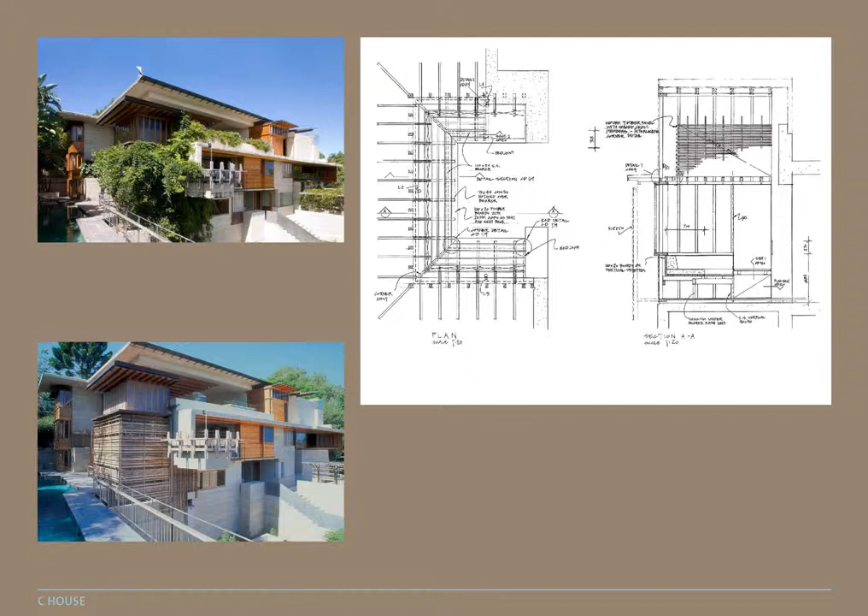There's a screen here which is a trellis for the landscape. It's also a pool fence because there's an occupied space inside. It's also extending that idea to how one experiences the room - a sort of trellis, a set of battens in a very Queensland idiom where the light filters through from the north. At night it's a lantern, tent-like at the top, so the light illuminates other spaces. All of which is developed, I think I have it in the next image, from the interior.

Excuse me, lost my button.

Developed a set of planes, an outside plane, which was the one we saw from the outside, which was the trellis. It has an openable window sash system, so it is a ventilating Queensland room. We do have insects, so there's an insect protection layer.

At the upper part, it's intended to be a lantern, so the illumination is critical, and how that becomes enigmatic in the space through the evenings. By day, the way the light comes through gives very dappled light on the interior. All of these things are orchestrated from understanding how the construction and materiality can enhance the ideas that really are about experience.

I'm not sure how you normally conduct these. I can just keep going, but if somebody really desperately wants to ask me a question, please do.

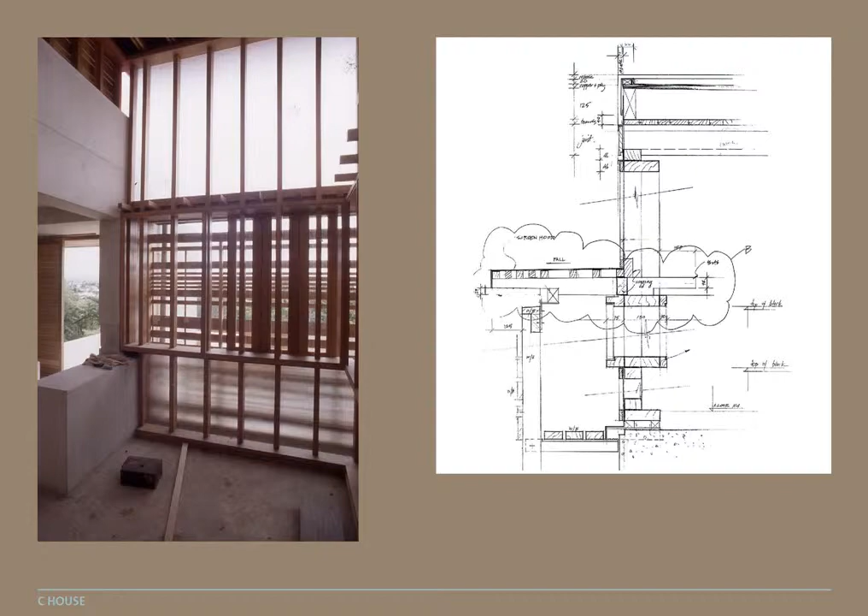And here it is, finished but unoccupied. To point out a few of those moments in the building, obviously an occupied edge, it is a tall space, part of the experience of occupation.

We understand and argue it's absolutely about making comparisons. So within the dwelling and all buildings, hopefully, there are comparisons of scale: tall and short, fine and rough, light and shade. We've all talked about being in a cave or being in a tent. If one is exposed to a range of experiences and then has a choice of how to enjoy them, we think it's an enduring thing that one can embed in a building.

I've jumped forward, but the idea is extending how, in the materiality, the tent and the woven upper part is basket-like. We were genuinely thinking how this and the fabric was sailcloth. It is a tent, and in a building made for life, you can rely on very primitive emotions, so this canvas or translucent material flaps in the breeze and adjusts the light and so forth.

Because it's an independent building that you occupy and get inside, you can believe that you actually are in a garden, or in an arbour, or in a tent, or in a light fitting, all those things. Everybody has their own interpretation, and that's fine because it's never one thing.

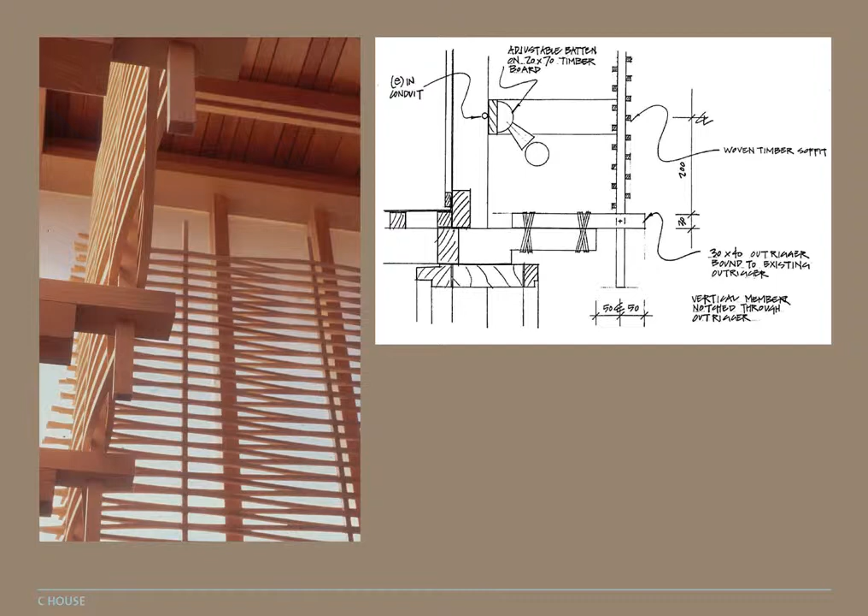But when the celery top pine was available, our client found a suitably large quantity of it, but it was already cut in particular pieces, so we had to work with the makers to work out which piece would suit each circumstance. So the rafter detail is a composite rafter made of 3 pieces of timber that was available and already cut because there wasn't large timber available. A lot of the tectonic detail in those decisions came through this process.

Once one comes into the formal space, the living room - I'm purposely not showing the building, for those who don't know it, it's very hard to see where one is - but I think one arrives in the courtyard at the centre of the house, then can move into a hall.

The hall has been detailed so it seems as though it's outside - the exterior finish becomes interior. A shiplap detail in timber work is made where the tongue is made of translucent material, so it's as though it's a screen. The idea of external screens and internal screens are all made one. Very precise, and people don't necessarily understand it at first, but these are the things one embeds through the process that ultimately make a massive difference.

So when one arrives in here, there is this ambiguity - am I inside or outside? There's an independent building that's made, which is the formal enclosure, as it was here in concrete and as it now is. So a full timber enclosure was made, here using the New Zealand kauri, as I mentioned.

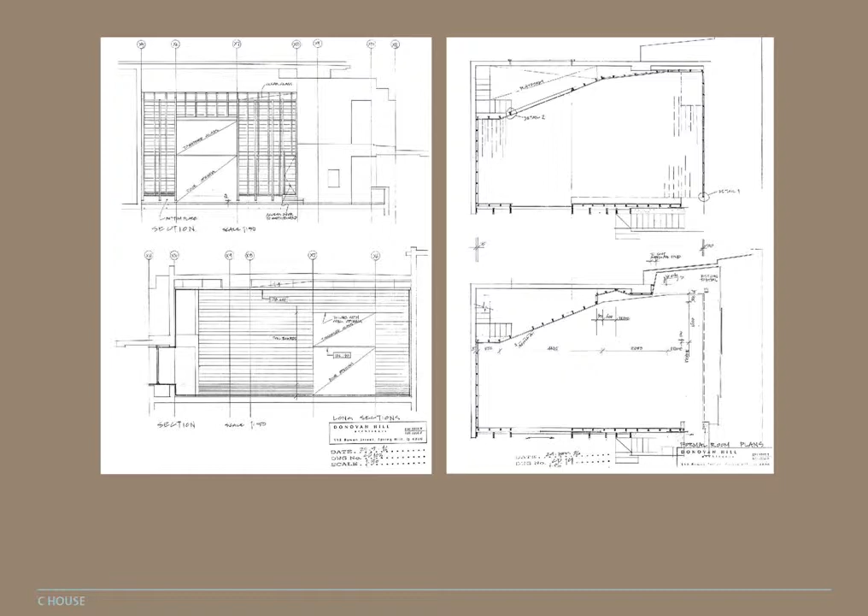Another anecdote about the project: our client recognized this was a house for life. We are still involved in putting in furniture, but in the first instance, he would sit, and we would sit, on concrete or timber lumps and bumps. So there's a way of occupying the building edge, and it's its own room — you recognize it has its own ceiling, its own soffit. Very much a graphic idea of extending the dual proposition of this protecting ground plane and enclosure of concrete, and the refined parts made for occupation in the house.

Some befores and afters.

There are, as you'll see directly, quite significant views to Brisbane City. Brisbane does operate in a way that views are important — it's a very view-centric city. In general, if you have a view to the city, irrespective of orientation, it seems to influence land value.

This house does have a view to the city, but also cross-axial views to landscapes, setting up plates and moments for how the house can operate, including the furniture store I described previously. There's a platform on top, and we imagined the concrete almost as a massive light source, with skylights on top, as you can see — the light bounces off the concrete and comes into the interior. This is also overlaid with the idea that there will be special events, and there have been — I've seen a small quartet sit on that platform and play wonderful music at the occasion of a wedding.

This extends the thinking about a Queensland building — the typical understanding of battens, light and shade, filtered light, and so forth. Because of the idea of concrete and these refined timber parts, this building likewise has a translucent tongue detail that allows for enclosure. The reason it has tongues — well, this one doesn't, it has brass fittings that separate — so one feels as though one is in a space, but it's the same climate as the hall.

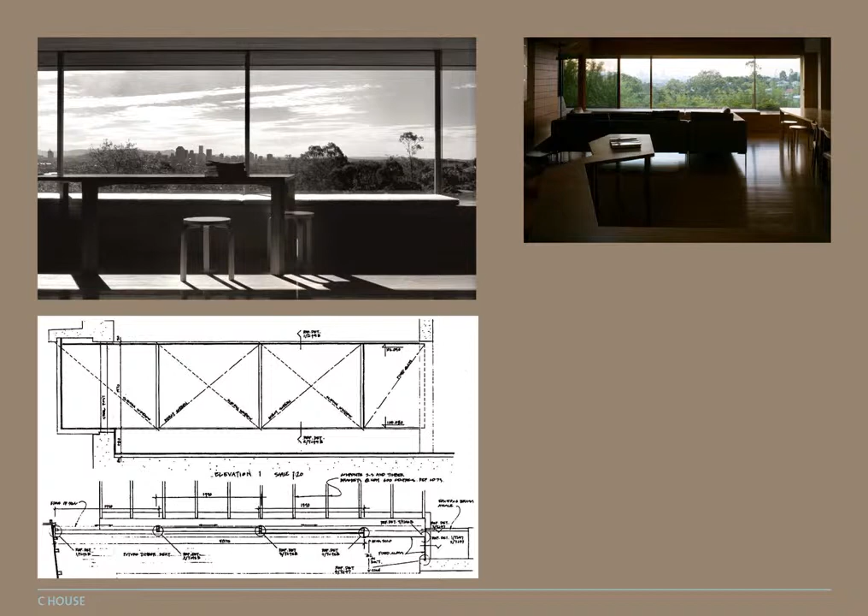We thought that if one can set up a system with almost frameless, adjustable views, it becomes an idea of an opening one is looking through — very powerful in some cases. It's difficult for the uninitiated, or people who haven't been there, to know whether they're inside or outside — looking through a hole, or through a window wall that one can close and operate.

And those details are shown here. Pragmatically, the cross-section of that part of the window, the same window. I described how one occupies the edge. There's a series of inventions here, or things that we worked on with the builder and with glazing contractors.

The glass in this project is in some ways structural. There are 90-degree planes in the glass to ensure, like this amazing example here, how the glass is spanning between studs. One has to think about, and clearly there's consideration that ultimately influences perception of the building, subliminally or consciously.

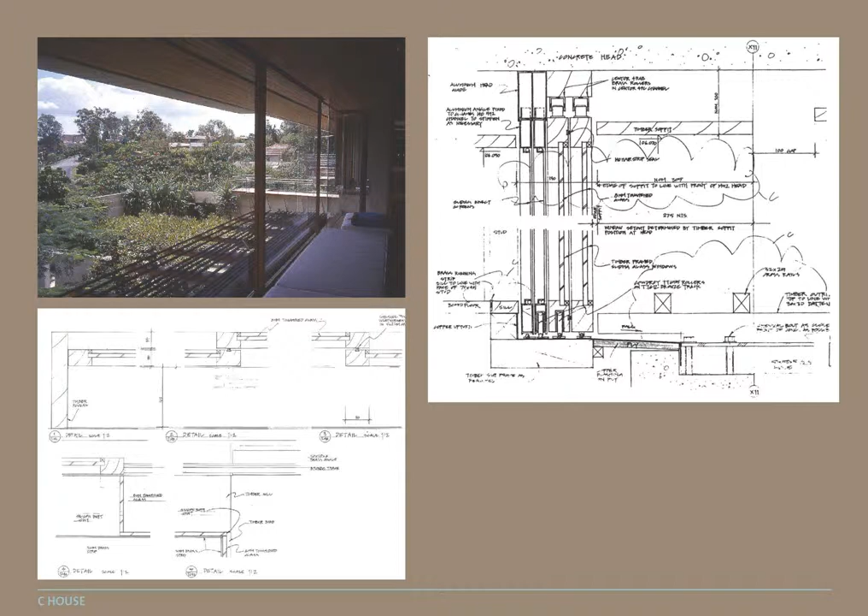In the idea of how one is making a landscape, the pragmatic requirement that sets that in motion, in this instance, is a horizontal trellis outside, which one sees from the arrival point, and which, when one looks through the window from the previous image, actually controls the foreground. So this has a dual role, and you see it here in some detailing.

So the hall on the other side of this, which I described previously, is underpinned by the idea of: once you actually enter the house, when am I really inside and when am I not? Because you arrive in this space and know you've arrived, but you're very much outside under a roof, a very room-like experience.

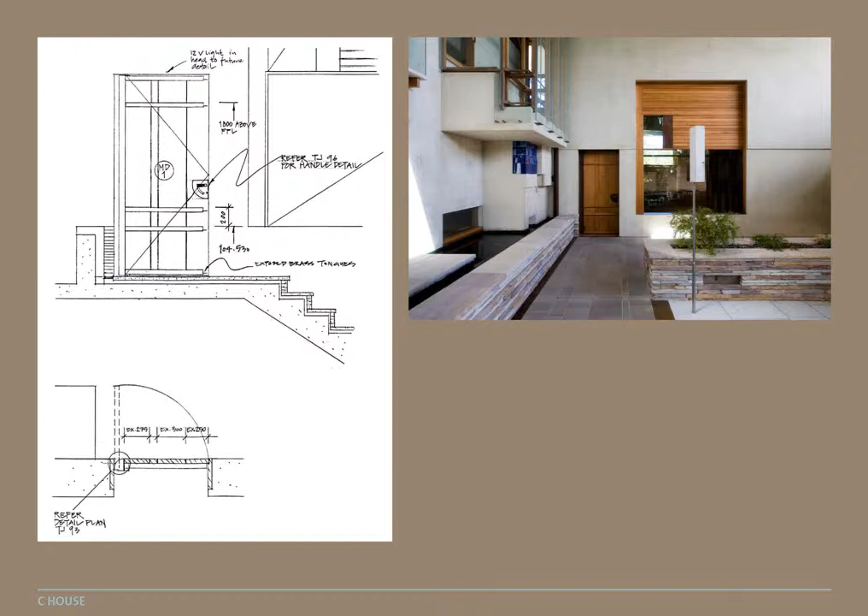In selecting all of the celery top pine and going through that timber list I mentioned previously, there was only a certain amount and certain sizes. We ensured the largest pieces were held until this moment. I think it's the most significant moment of arrival, and there are some 300 by 50 millimetre pieces of celery top pine that you see here drawn and ultimately in situ.

And they too have been detailed where there are gaps in those boards, but in this instance being true enclosure with a brass tongue. So very big boards, some horizontal rails, some brass reinforcing strips, which for those who care can see it in the detail, all of which is actually expressed to become the thing people respond to.

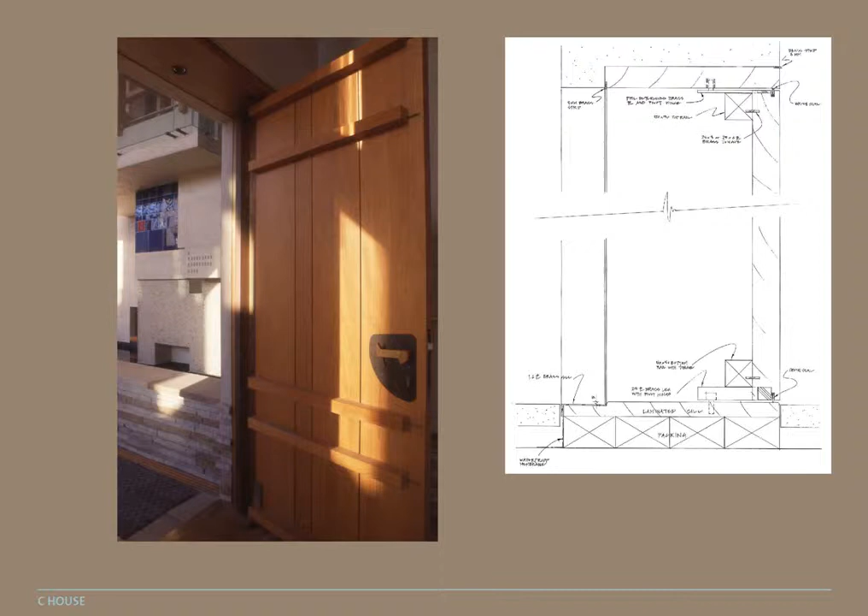So construction is absolutely firmly part of the aesthetic of the building, so much so that the things that could be hidden are expressed. Brass strips, which are reinforcing strips, are expressed as part of the detailing. Obviously the handle is part of this, which I'll show you next.

From the interior, there are very purpose-made parts, how if it is a gate and one is trying to make openings, apertures which are openings and not doors, and therefore having reveals that are not rebated.

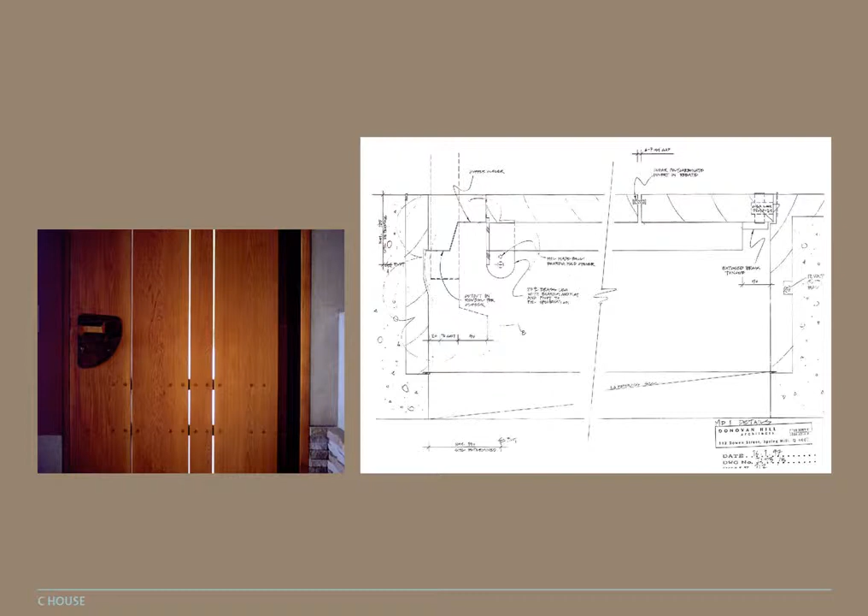I'll get this right, I'm sorry about this. This is a plan of the detail. Here's a timber jamb that's inset into the concrete, and on the other side this is the door, and there's a closing piece of brass that, when the door pivots, opens and allows one to make a detail which you can't see in the image, I'm afraid, so far away, but it extends the idea, the craft and the intelligence of how it was put together, reinforcing the intent for it to seem as though it's a gate.

And even in this instance, how one makes handles—I think as a little anecdote again about participating in this process, if one has an idea that one is participating with others, I wouldn't know how to put it, and I didn't know how to put it together previously. We worked with others, we worked with these two individuals on brass paneling and so forth. But the idea comes from one which is about the building in use and the comfort of occupation.

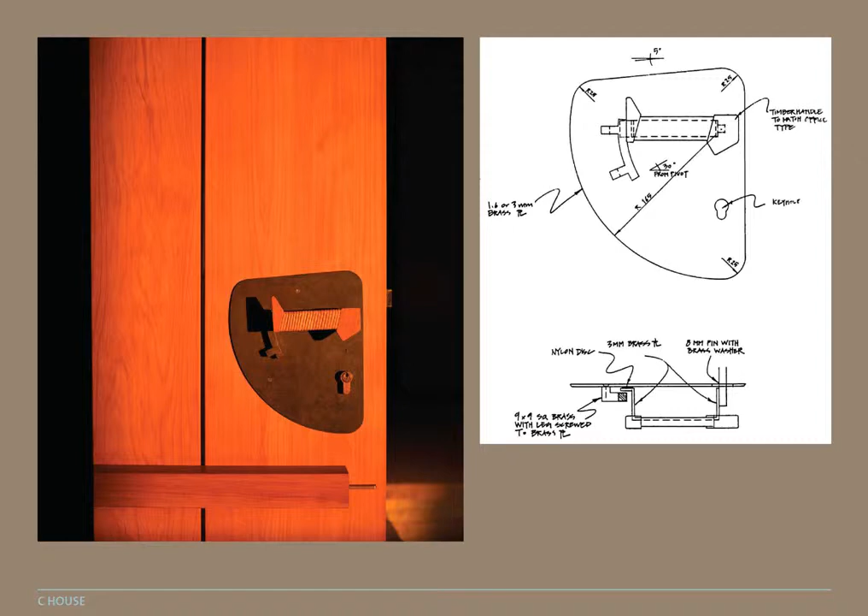If ever one was going to demonstrate that—and there's a whole history of it in architecture that we know, and this is an extension of it in our little moment of the world—how that can be understood and resonate through the quality of the building.

I think the next question is, how do they understand the ambition for the place? How do they get across the line and understand that they really are going to be putting all of their efforts and knowledge into this building? That's part of working in a group of people, being able to understand those things and promote the idea that this is an opportunity to demonstrate our skills - not for its own sake, but for the qualities asked on behalf of the proprietor. So what better way of making an enduring quality than having it developed through the way the house is put together.

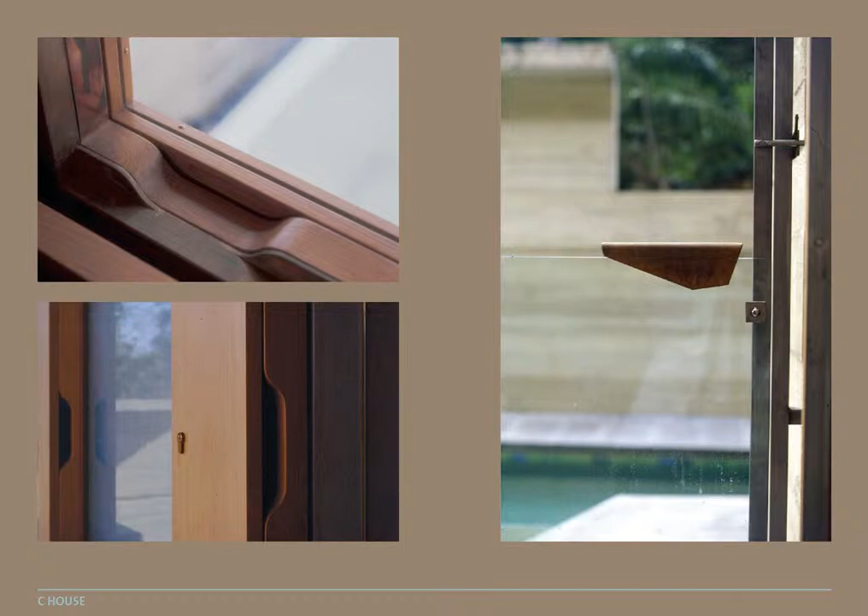I can talk about lots of things involved with it - the outdoor space as it is at the moment at the point of arrival. I think there's one more set of images about this house, about this box, which is an adjunct room to the main bedroom. You can see it looks through the outdoor room to the city. So it's about a view, but it's way more than being about a view - it's how it's part of a composition of space, or adds to this composition of parts within the courtyard.

Some other things - it is also celery top pine. These are offcuts of New Zealand kauri. When we were profiling timbers and there was a pile of timber, everything was used, because everything is very precious - nothing was thrown away. Its functional role is that of sound attenuation. Being a building, there's a road down the hill with road noise coming up, and there's soundproofing behind it.

So everything has this required sort of output, if you like, and then how can one extend that and develop it to contribute to an overall composition. Clearly, when one looks at this from the outside, it's a set of elaborated structures. It's sat underneath the light, and it extends the idea of a landscape. What really is it from this space?

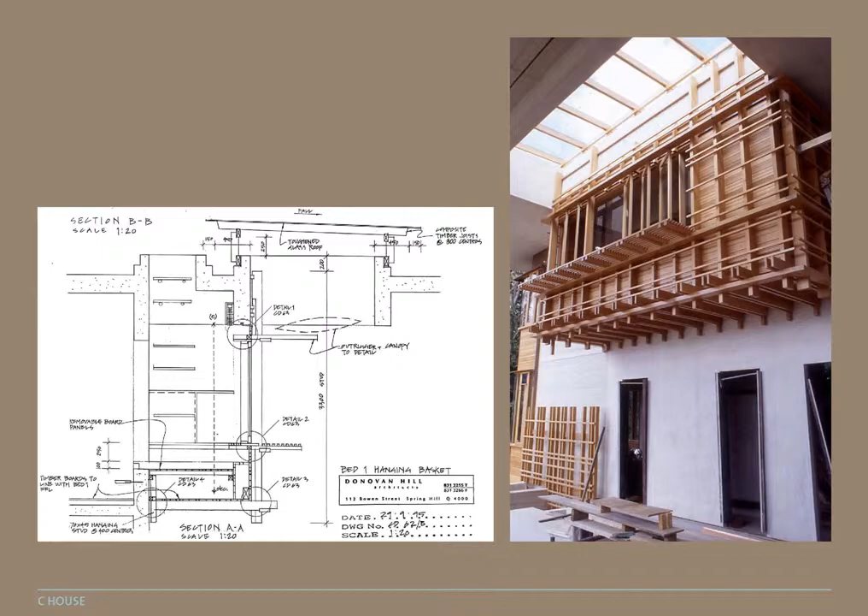To look at it in cross section here, this is the outside from where the photograph is taken, and here is the interior, which I'll show you directly. Things that show up on it are really by necessity, and I can see them occurring in this house too. Michael Markham and I were talking about an opening door in this sub-room, which for the children is a very large door that can swing out wide to make privacy in this room - simple things that through the action of use become absolutely clear once they're in place.

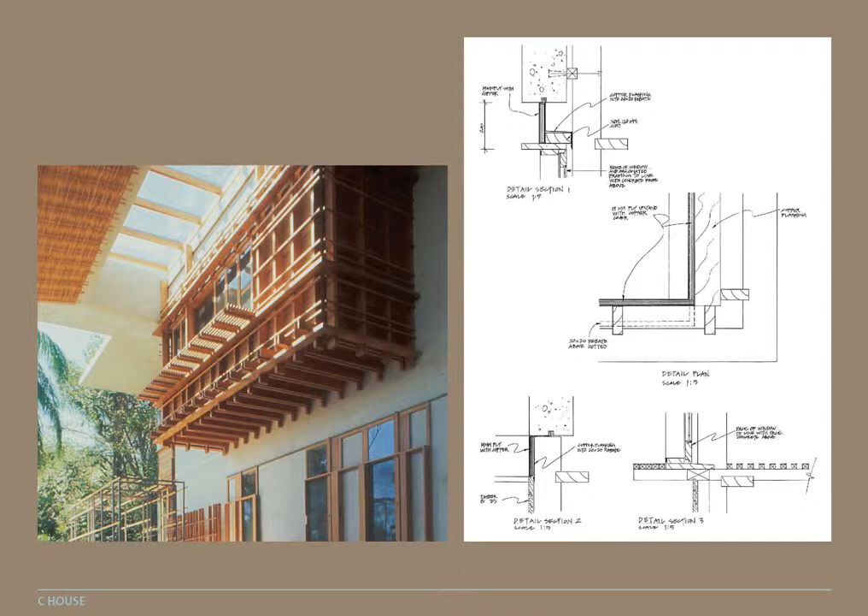In this instance, that is the main bedroom, and here is the public room of the house. One does need to establish privacy, and this horizontal projection does that. In addition, it's very light reactive and demonstrative of the idea of a trellis that has become an occupied place.

Going back to the cross-section, I should have pointed out there is a hole above it, so you can slide back a hatch and sleep here under the stars - very subtropical. Also only the owner of the building can actually get onto the roof. It is concrete as well, so this is the way of getting onto the roof - it has a whole lot of functional demands rendered in a certain way.

I didn't have a photograph, I'm sorry, but there is actually a bed here. Functionally, it's almost the primary space in the concrete room - the room itself is only about 3.2 metres wide, but long, so it has two settings for furniture, plus this space, which is a main way of occupying the space. In addition to all those things, it's also storage - underneath here are storage panels.

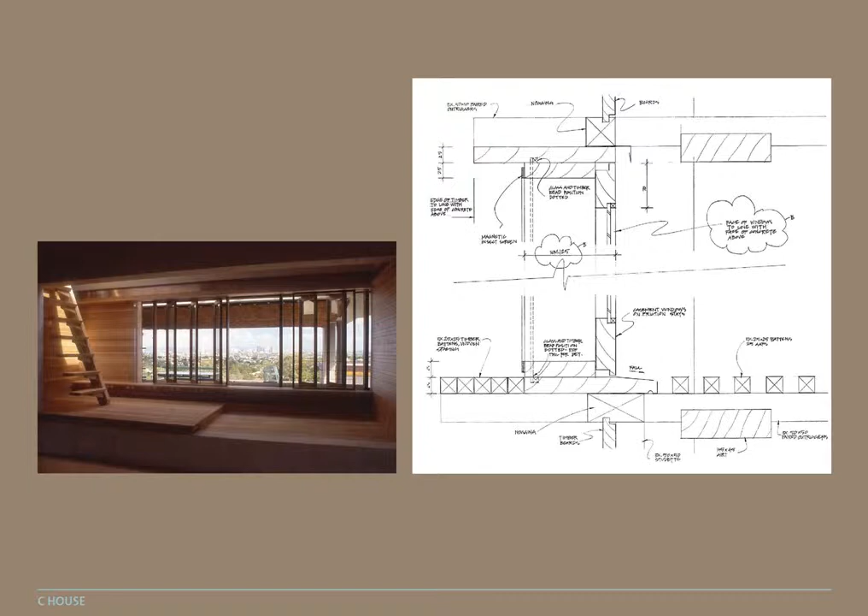So I'm going to check my time because somebody's going to keep an eye on me. How much time do I have?

I'll go quickly. So then how does one extend that thinking into other buildings, into sort of larger scale buildings? It's a question often asked about people who do a lot of residential work: well, that's all very well and good, but how do I pull that off when we're involved in larger things?

This is Santos Place in Brisbane. The real thing about it is that we were trying to make a Queensland building within a very strict corporate and development structure.

I mentioned this thing about making a sphere of influence. We're in the very early days within the Queensland process to actually have this set of values that everybody effectively signs off on, and one can always refer back to go forward. What is it that makes a building in our setting that one can keep coming back to?

Colour was something we introduced very early on, and there's a whole history of colour in buildings which one can say is contemporary, or whatever one wants to describe it as, but there is a fact about a history of architecture with colour. The Queensland building needs to be a modulated building.

You recognise the things here that aren't ours - anybody from ARM will forgive me - but it's a great example of people thinking about the way buildings can work with modulation. The tectonic, and I think that's the core idea of what we're talking about, is how you build buildings and how they become the identity of the building.

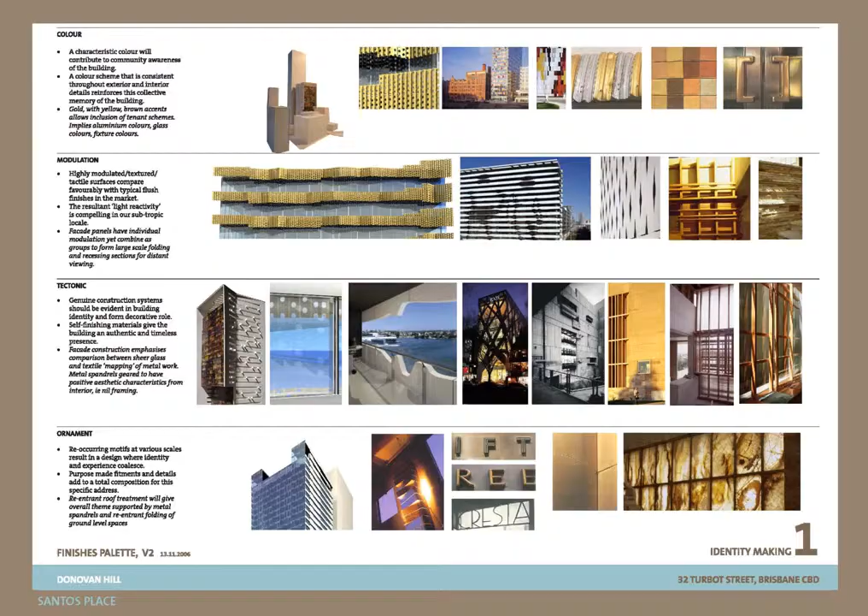And although we called it ornament, what we're talking about - and it's still valid - is how one can include motifs that have resonance at all scales of the building. So we developed this with our client and the team, and that was all endorsed.

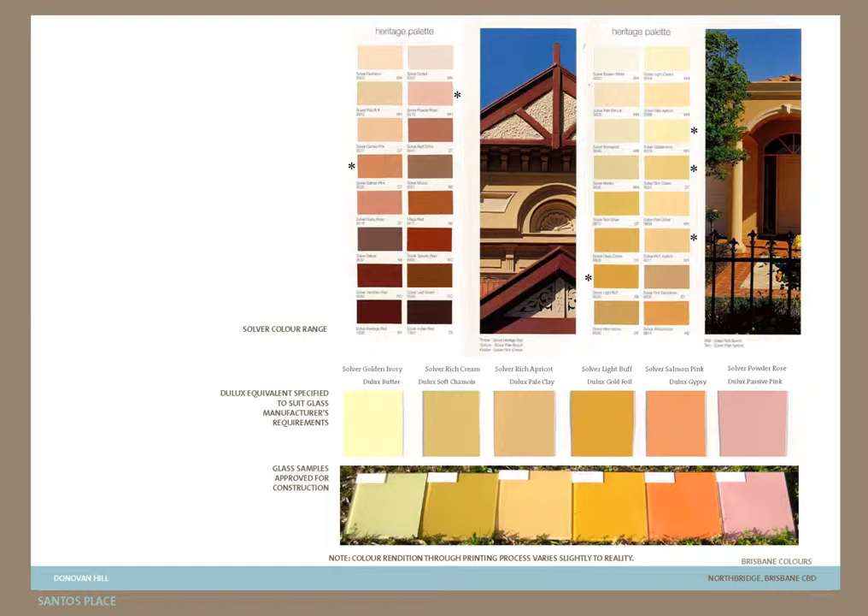Colours of the building were developed out of a palette based on Federation colourings of Brisbane - other examples from the history of buildings. How do you make a building in Queensland when all the pressures are about economy, efficiency, and leasing? How do you make a building of its place?

In this instance we worked with a colour scheme very much about the place - the local stone and the local landscape. Our original model, I think, demonstrated those ideas about tectonics, the way facades can be very different.

It's a circumstantial building. A building isn't understood in the round - a building is understood from various points of view. So how does one extend that original model, and how did it end up?

I think if one can, even within this context, uphold a set of influences that everybody can adhere to - and I think I can certainly describe some correlations between this and the original model.

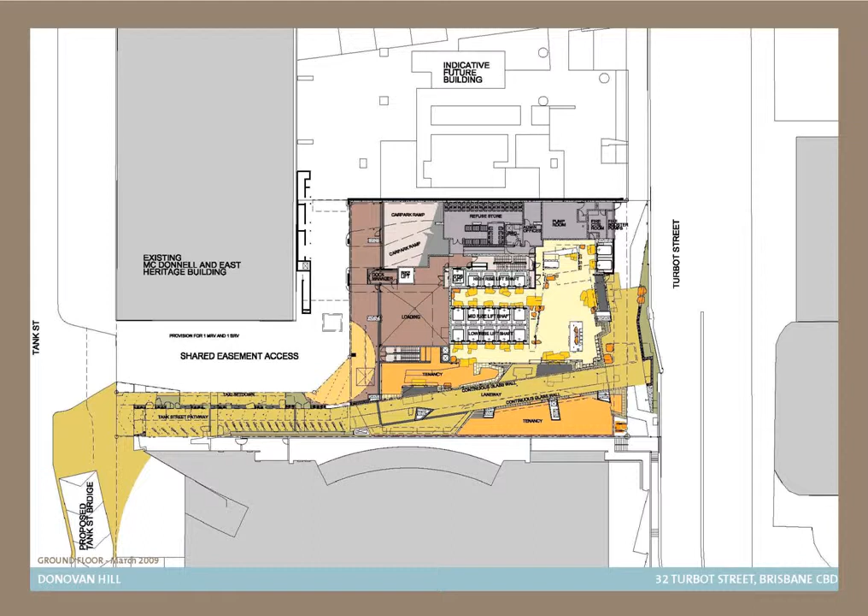I won't go into the building too much, except that it's got a very active ground plan, which Brisbane doesn't have many of. The floor plan itself is just an absolutely ruthless commercial efficiency diagram - maximum setback, minimum cost, maximum rent, maximum profit, all those things.

We then worked on how to develop those ideas in facade making - various options about in situ precast, tack-on formwork, spandrel panels - but ultimately, the significant thing about this one is that it is a design-and-construct process, so we are working in a secondary role to the builder.

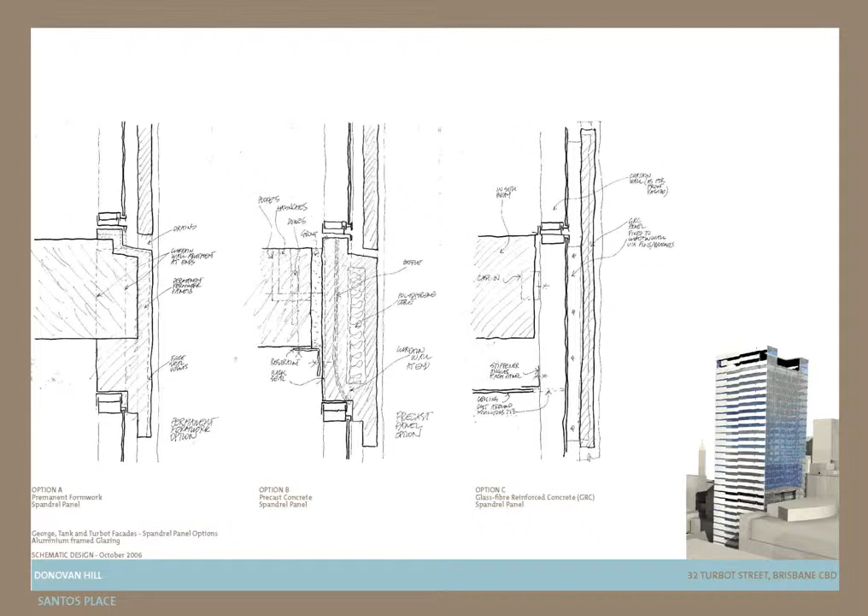The builder is telling us what to do, so importantly, early on in the process we tried to identify and get everybody to support the ideas of the building, while still finding how the builder wants to actually render those ideas. In this instance, like 99% of the buildings in Brisbane, although we tried, it ultimately became a curtain wall system.

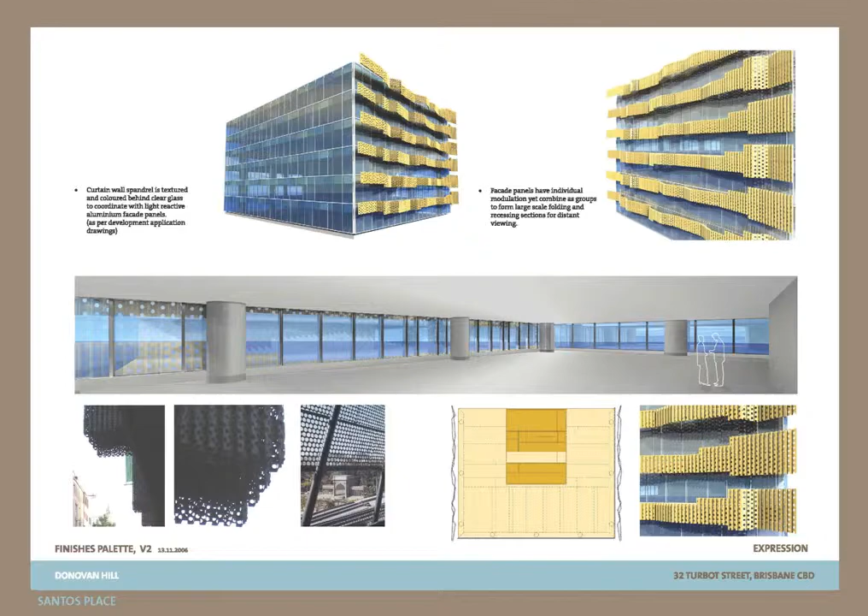That curtain wall system, the builder wants to get up as quickly as possible, get the rent, etc. So we developed ideas about modulation, which isn't only about the way the building looks. It does have a genuine ESD value. The two elevations on which it appears are the ones which have the low sun in Brisbane, so it is actually protecting the building.

Developing those ideas with our client earlier on, and developing them further. Still at this point talking about perforated elements in the elevation, but allowing for the enclosure of the building to be built very quickly.

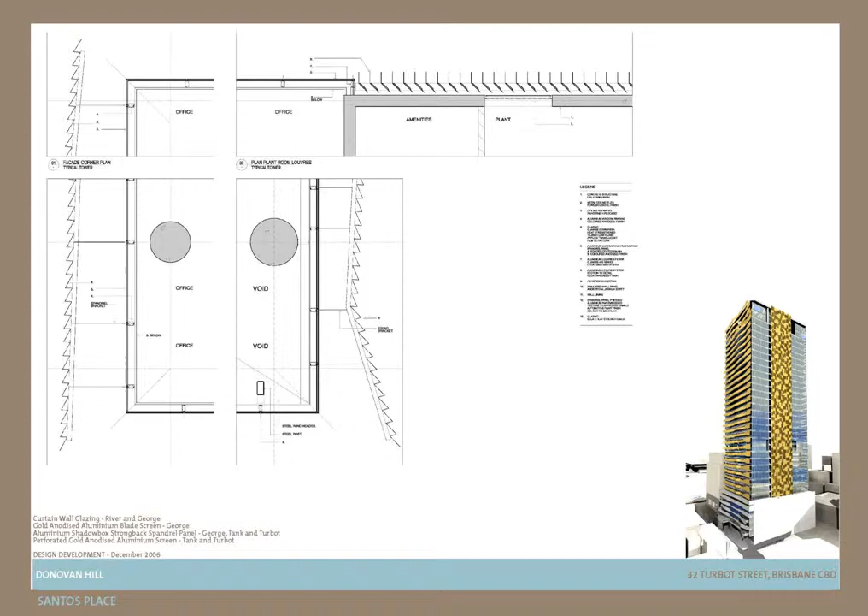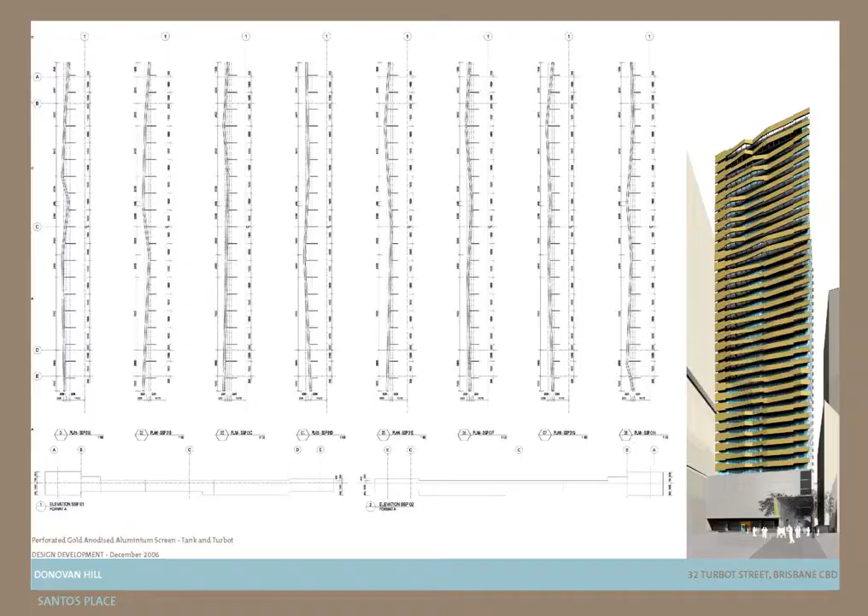Through the process, when I talked about a sphere of influence, I'm referring to authorities as well. So there's an approval process which is critical, and therefore the milieu in which one works is very influential, and the authorities are obviously influential in this setting.

So the set of drawings were made which actually ultimately became a prototype, and it's not quite tongue-in-cheek, but we got to the point about saying, how on earth are we going to not make solid panels, but extend the idea of making a motif that was recognisable in its place. So this prototype was made,

which is a zigzag in plan, so as the light strikes it moves across the sky. Sometimes it appears as a solid, on other occasions it's very, very transparent, and that was set up to suit the sun path and the protection. But then how to actually achieve that in a motif.

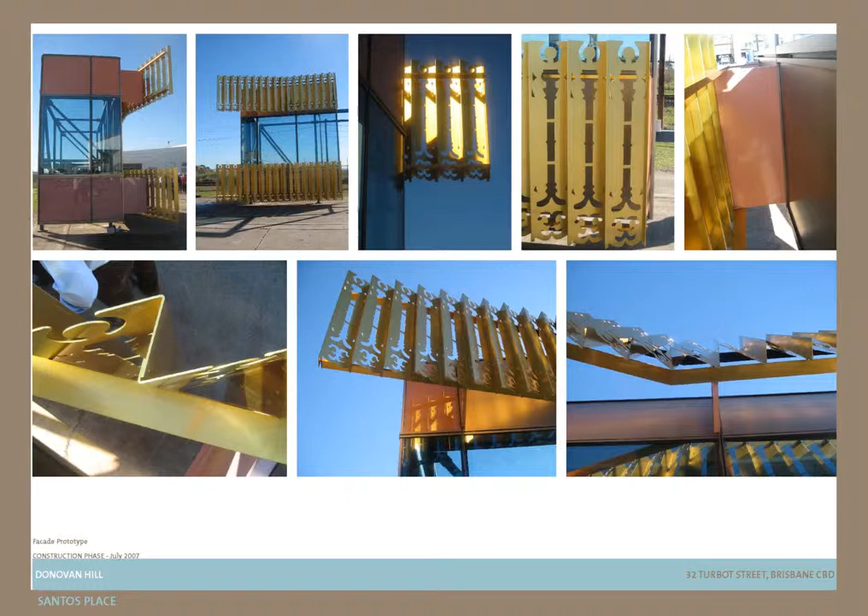This one is like, one might reckon, a Federation sort of motif of balustrades and so forth. Anyway, the point about this is that we do lots of things that then get dumped, including this, which was thrown out as an idea. I think there's a lot of research in buildings and a lot of things that get discarded, which we all understand.

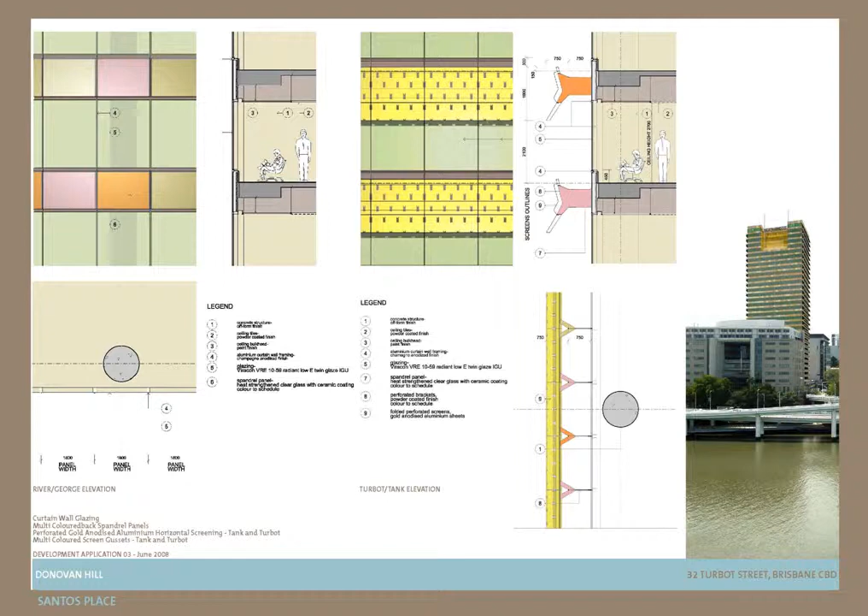We went back to an original idea through a process of working with these people, which was much like the original model of having a strip panel and some light reactive blobs in elevation. The light reactive protrusions were ultimately removed, and we developed this scheme.

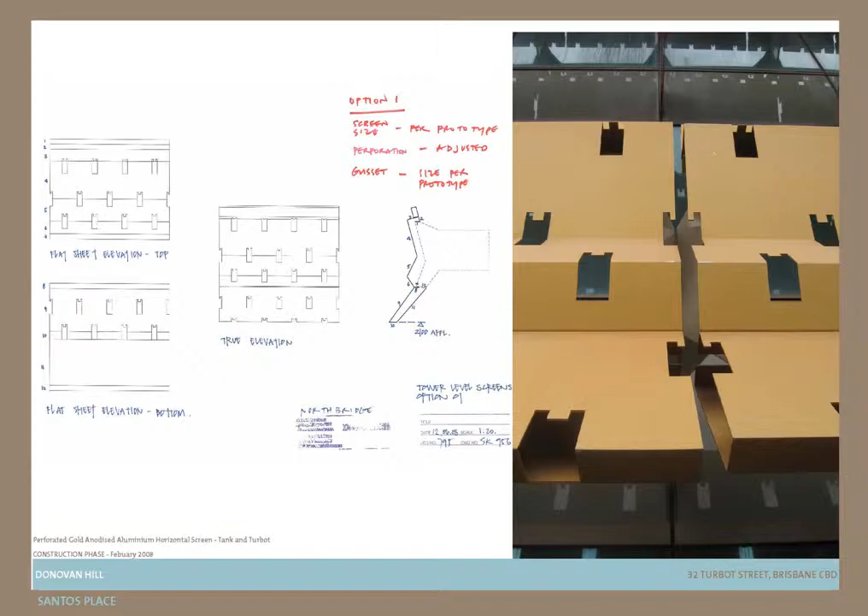We're able to think about it again with the group of people who are actually making it. So in this instance, it's not a matter of us as designers giving instructions and saying it will work. It's us setting the scene and setting ambition, and working with the fabricators who are actually making this stuff to see what is possible in an economical regime.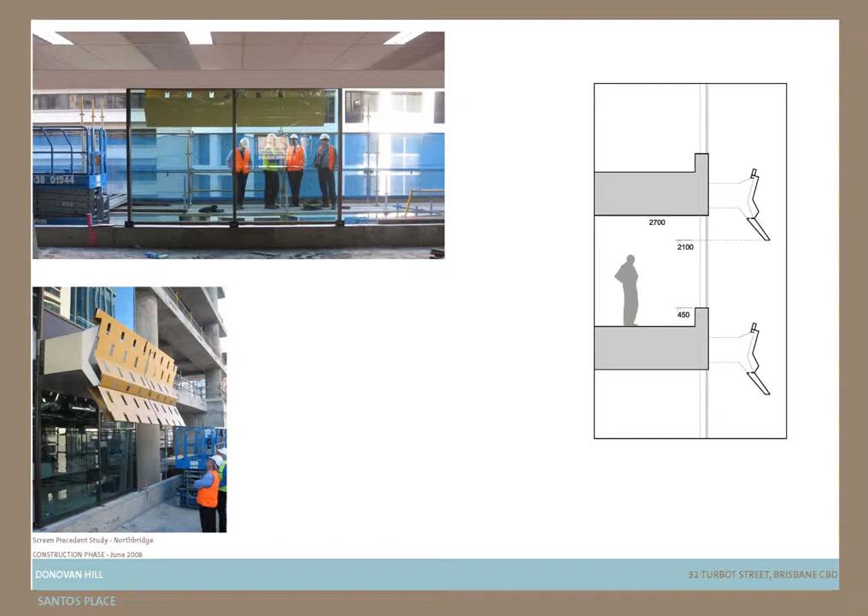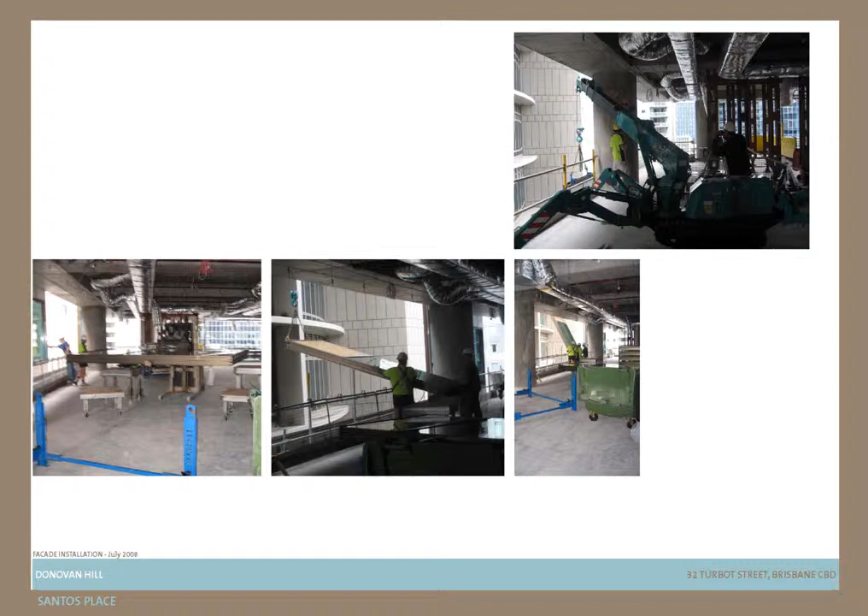In a sense it's very much like the previous building, but obviously not in its refined nature — the same process essentially. The process of installation, acceptance, always with people.

And just very quickly, the other building — it's exactly the same thing. How is it in a building which is also a Brisbane building? There's two things here which are very particular on this very commercial building: these sunshades and a brick building.

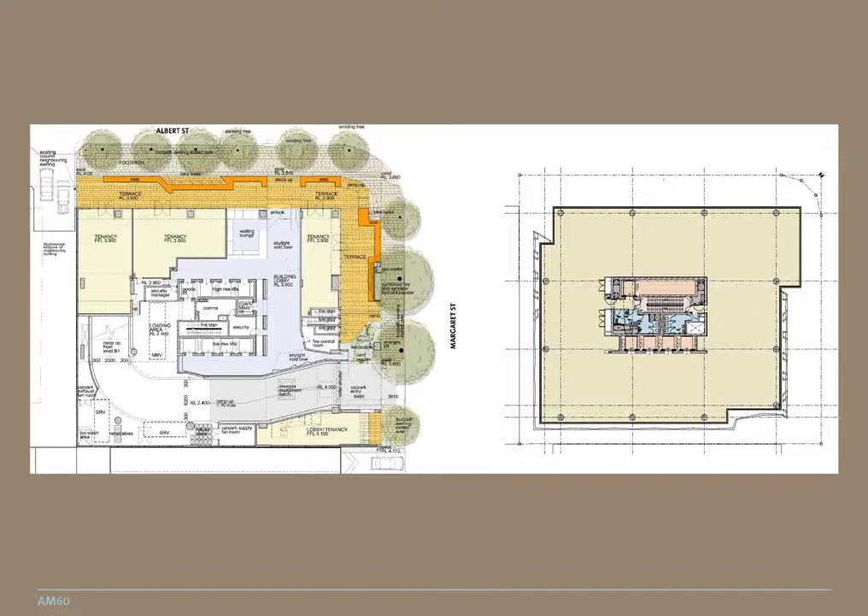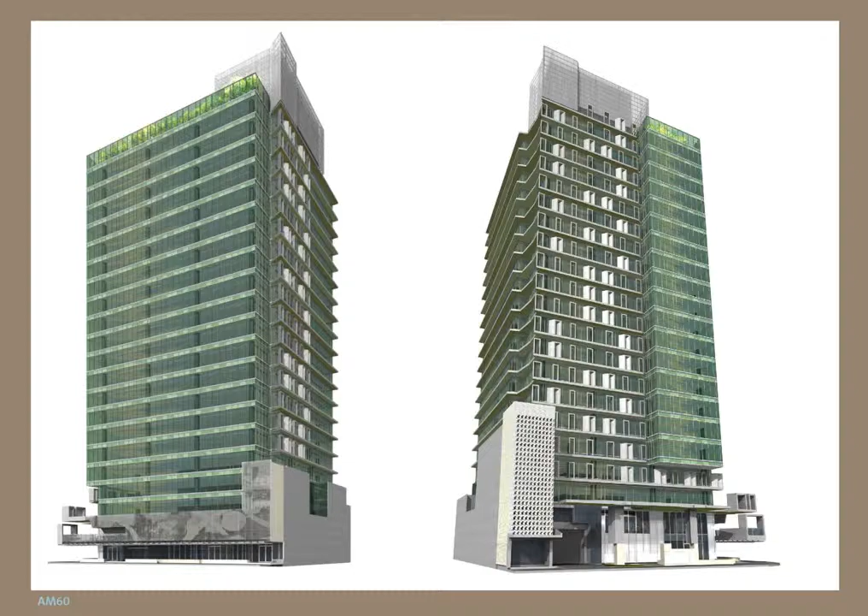Again, extremely efficient diagram. The building does respond to an urban diagram, the way that the city and the streets work, and the way that a building is understood as a top, middle and base. But very much from where we see it, the impact of these elevations on the street is a critical part of the understanding of the building, and therefore that's where the effort needs to go.

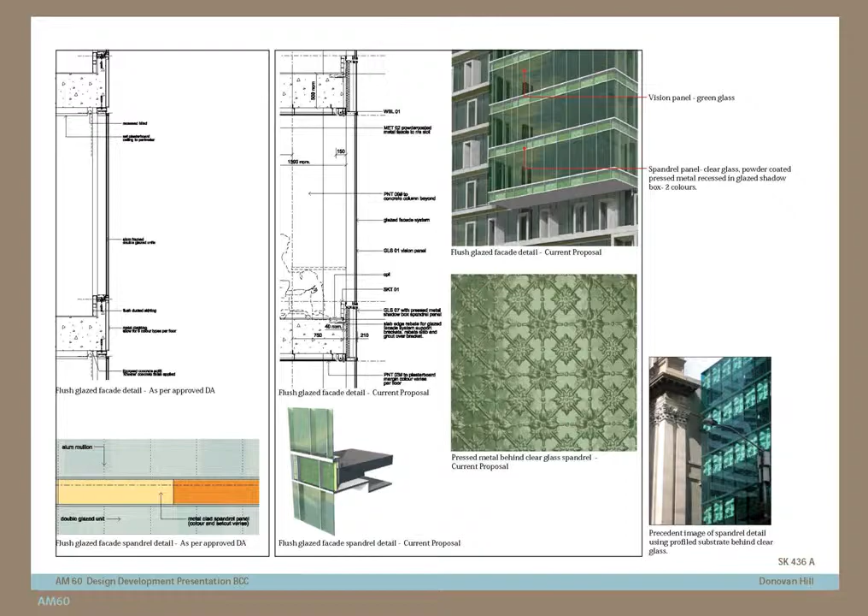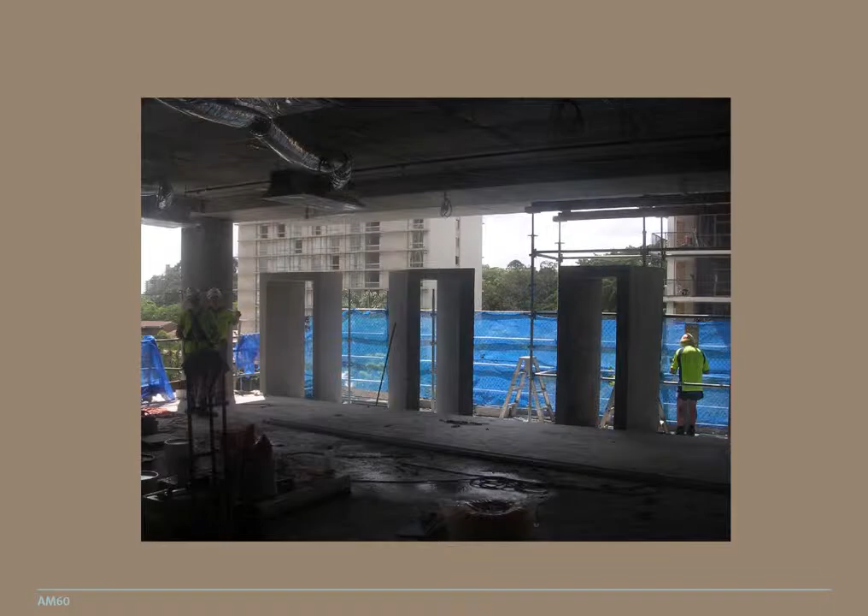And I'm leading up into these two elements here. Ultimately, the pragmatic requirements include sun shading and an urban response, particularly with the concrete building — how it sits in a setting that includes other brick buildings in the street, developing that with the contractors based on a sort of set of ambition drawings.

They're very, very rudimentary, yet at the same time very characteristic. They are only just U shapes of concrete. They do become emblematic in the interior. They are scaled to suit the ESD requirement, but also to suit the person.

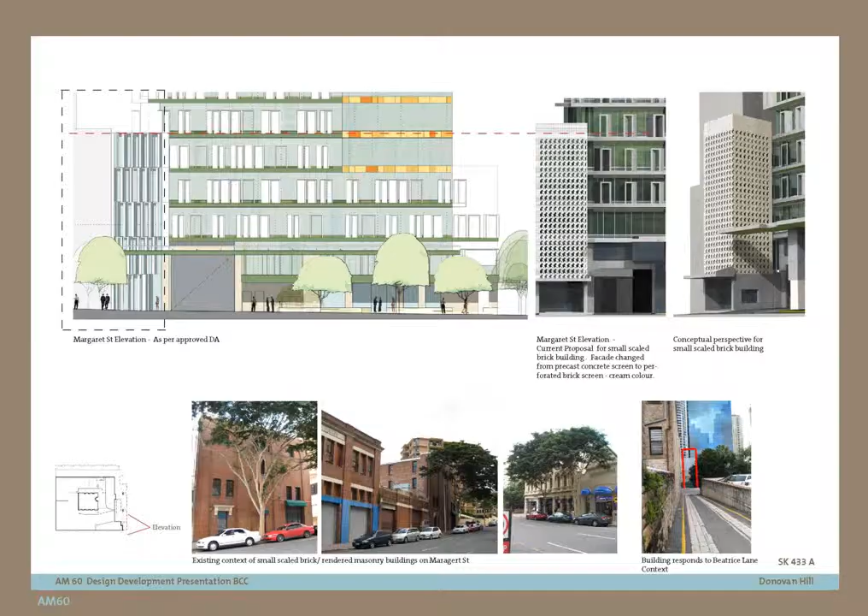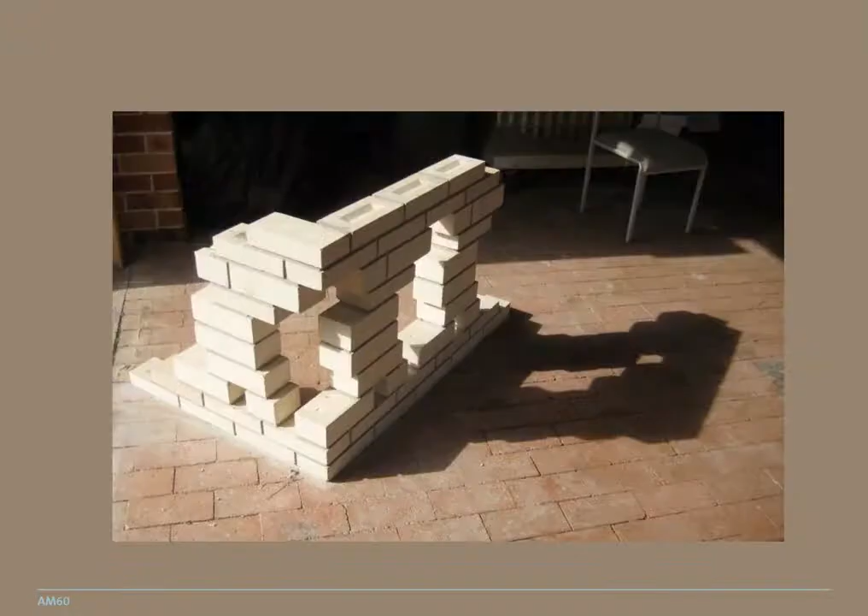And just finally, very quickly, the same idea in this little brick building that, as I mentioned previously, does sit in a setting of brick buildings. It does make sense when you're there about how it contributes not only to the building itself, but also to the setting, the wider setting of the buildings.

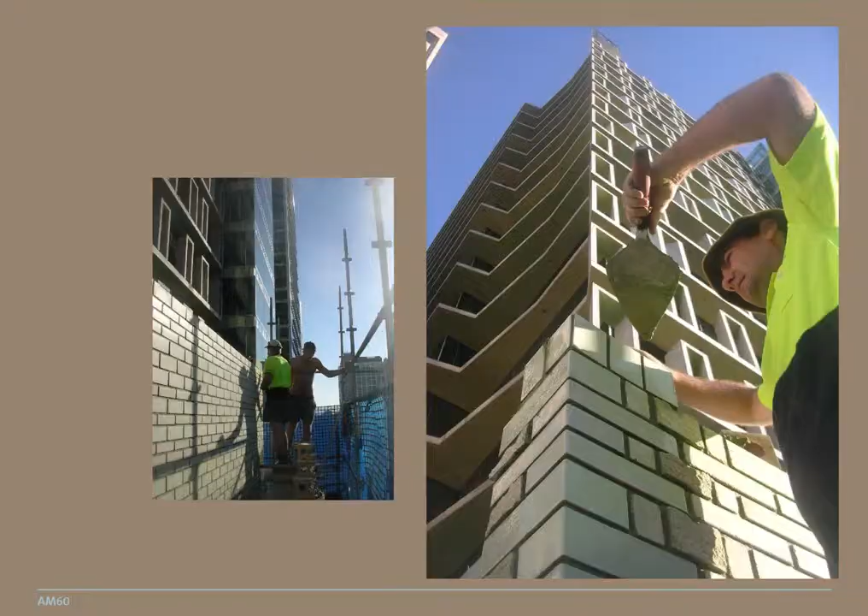Prior to starting this, we all have ambition of how one does a beautiful brick building. We could never have done this as individuals. We could only do it as a group of people, including the engineers and the bricklayers, including the Brick Institute who worked with us on this and developed a series of contacts, putting us in touch with the right people so that we could make these things out of different brick types.